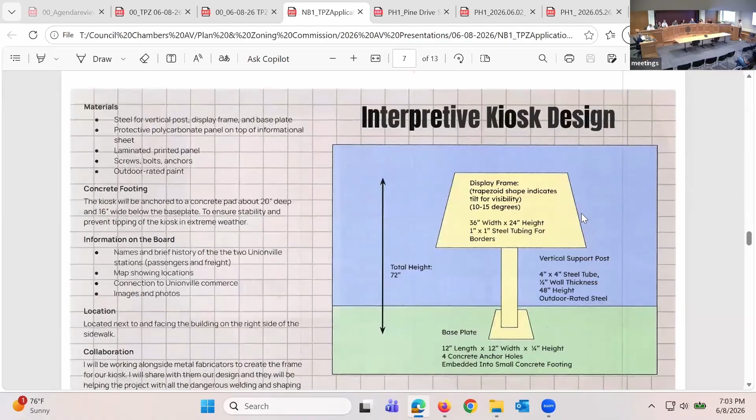So for that, I propose a kiosk which will have all information about that. Details on the kiosk are listed there. Can't see that far, but...

Okay, so for the display, I plan to have it look something like this, where it'll have a panel that will be 36 inches by 24 inches.

And there'll be a tube behind it that'll be 36 inches in width and 24 inches in height, with 1-inch steel tubing for borders. It'll be connected to a base plate, which will have a length of 12 inches.

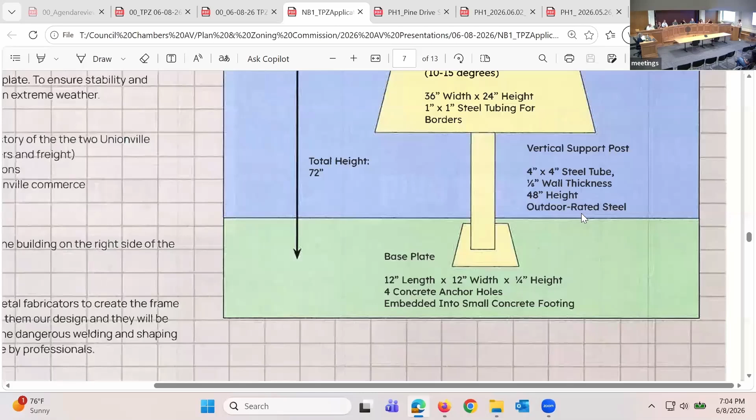And a width of 12 inches with a 1/4-inch height, which will be embedded into a small concrete footing of 20 inches with a width of 12 to 16 inches. The total height of the kiosk is around 72 inches.

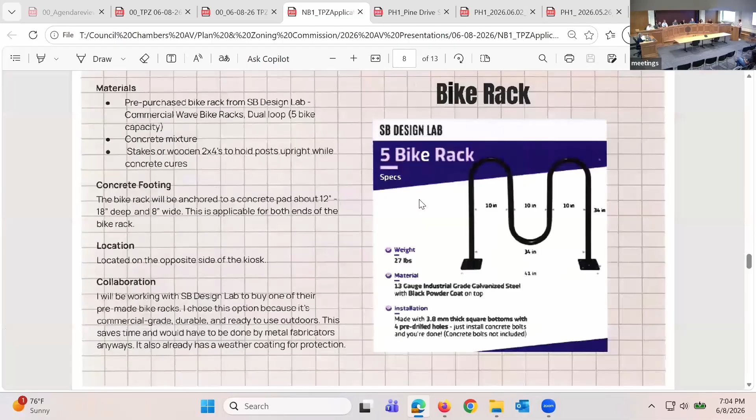It'll be located next to the building, which you'll see in a later slideshow. And my second component, the bike rack, will be bought from SB Design Lab, a company I'm partnering up with for my Eagle project.

I chose to partner up with a company rather than create this bike rack myself, because most of the components of the bike rack include professional fabrication of metal, and scouts wouldn't typically be able to do it because of the danger it poses.

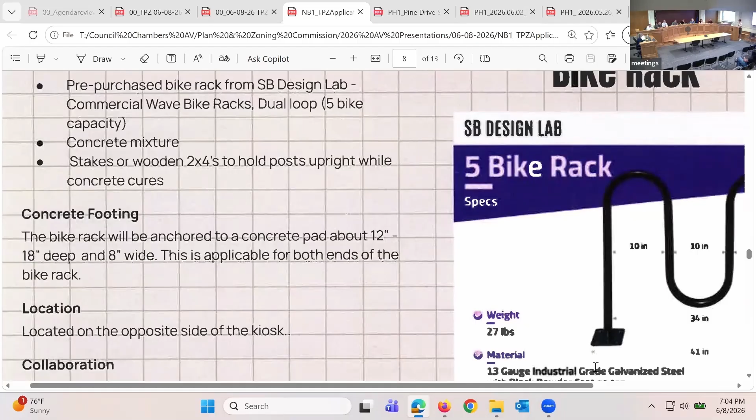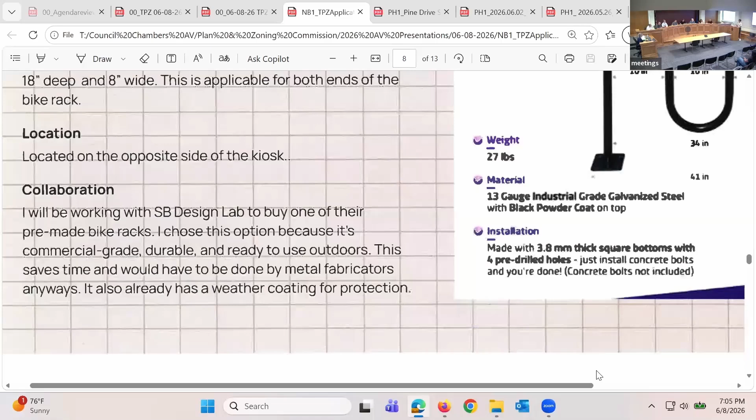But I chose to do it through this company because I checked the reviews and they were great. It was a cost-effective material, and it was really weather resistant, which perfectly fit what I was looking for. It'll be located on the opposite side of the kiosk.

So this is like an initial cost, but it'll be around $550 with approximate tax and no donations. But moving on to the next slide to see all the collaborations that I'll be doing.

First of all, Farmington Displays, where I'll be working with them to help create a panel for my kiosk, which will include all the information, the maps, images, and all the text. They're also helping me figure out the layout of the design overall.

And I chose this company because a lot of previous scouts have also worked with them and have had good success, as well as good donations and helping out the community in total.

My second company, SB Design Lab, like I had said previously, I'd be working with them to create my bike rack. And I had talked with Mr. Sear previously, but unless the town has a specific provider that's more reliable or more wanted, we can definitely pick them as one.

For the metal, actually, I think this is a previous version of my presentation, but I had chosen Metal Supermarkets in West Hartford who had the metal I needed for my kiosk.

That, and they also fabricate it according to my needs. So as for collaborations, those were it.

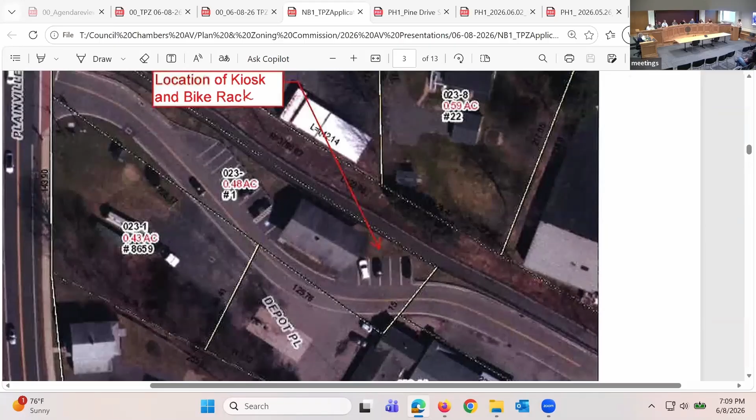Okay, great. All right, now on to the technical stuff - the concrete pad that you're putting in, what's the depth of that? So on the kiosk, it's 20 inches deep. Deep, okay. Yes.

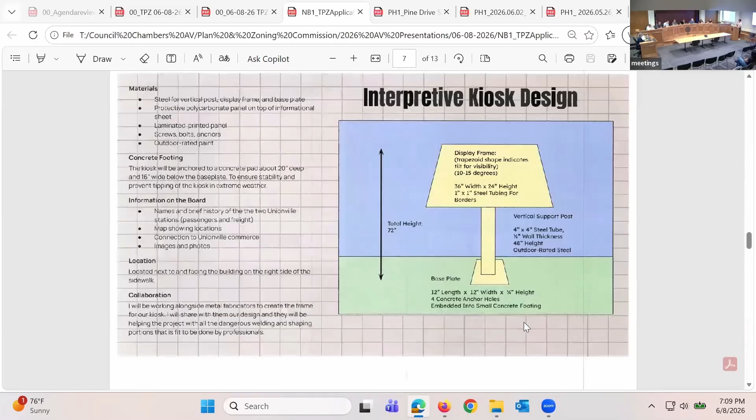So that was one of my questions actually - on the bike rack, I'm not sure if the town would like a concrete pad on both ends, but that's definitely an option, which would be around 12 inches of depth on both ends.

Okay, all right. Just make sure you work with the town on that, especially after this weekend with the windstorms we had - for the kiosk, we don't want it to be a sail, so you want to have a base on it so it's going to hold it upright and not snap off or bounce around on you. Definitely. And then we're going to want it far enough back where nobody's going to hit it going through the trail.

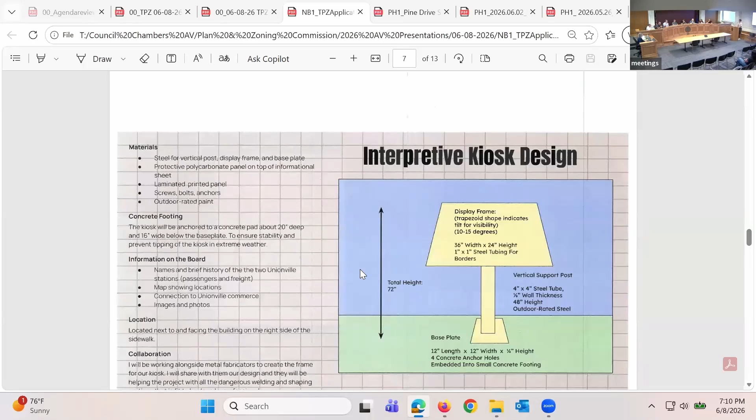I just had two quick questions. One is I couldn't quite understand how it would look when it's standing up - it gets up to 72 inches. Is it tilted? Is it a board that's a trapezoid shape? What does that look like from the side?

So if you were to look at the kiosk standing straight, it would be like if you've ever seen at a park or trail those stands where there's a post and the panel is vertical, kind of angled so you could read it. My idea is similar - it's basically the post and then the panel is angled sideways and tilted, so it's easier for people to see rather than it just being flat on the ground or flat on the pole.

Okay, I guess that's where the 72 inches threw me off, because that's more like a 4 or 5 foot level, not above my head. Yeah, it would be fairly large.

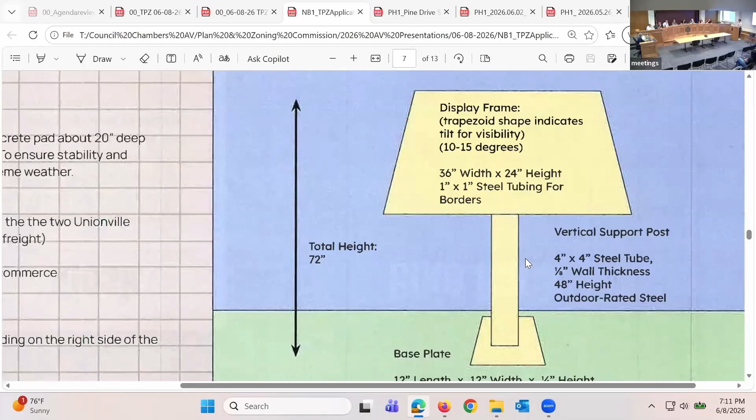My only other question is for the metal tubing you're using, are you going to have any corrosion controls? The tubing I previously thought of is coming from Metal Supermarkets in West Hartford, it's 6013 aluminum alloy, I think. I searched it online and it showed as 20 to 50 years lasting in outdoor weather. Thank you.

Sharia, first I just want to commend you and thank you for your commitment to the town and to the history of our town, spending your time committing to doing something like this to help make things better. So thank you. I could tell from your proposal that you're a detail-oriented person, and I appreciated your presentation. You did very well.

Thank you. I did have some follow-up questions similar to Commissioner Cordero. So at 72 inches, the top of this slanted board will be at 6 feet, and the bottom would be something higher than 5 feet because it'll be on a slant, right? No, the post - no, it'll be between 4 and 5 feet. But am I right about that? So the bottom of the slanted platform would be between 4 and 5 feet, somewhere in there. Yeah, the post itself is 48 inches, and then the others would, if you can visualize that.

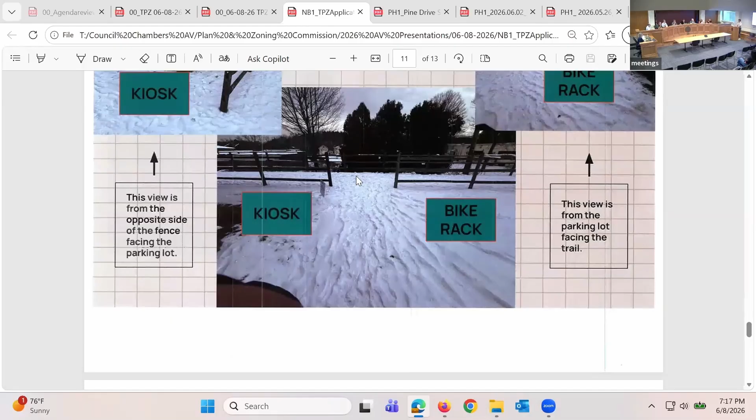Thank you, Mr. Higginson, great presentation. One thing - the picture of where the kiosk and bike rack are going to be, is that an access point to the trail? Yes, in the middle there's a slight opening for trail users. So those aren't going to impede with that access point, correct? Sorry, the kiosk and the bike rack won't impede into that access point? No, the kiosk will be about 2 to 3 feet away from the sidewalk, and so will the bike rack. Okay, alright, that's all.

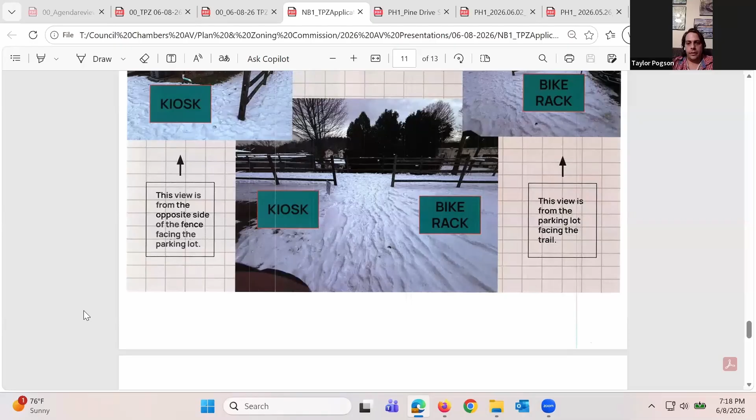I didn't really get your question, could you repeat that? So what's the actual panel, your information panel, made of? So I have to talk with Farmington Displays on that still, I'm not sure what their idea is, but over the panel there will still be a polycarbonate layering, which is kind of like a weather protector sheet that'll keep it secure.

Okay, yeah, so if you're going to do wood, you're going to want something that's rot resistant, bug resistant. You're going to want some kind of pressure treated lumber there, because even with a cover, moisture is going to get under that cover and destroy whatever information you put in there. But I think those are my only two concerns - the height, and keeping in mind what you're making it out of.

Yeah, exactly, that's why I wanted to work with Farmington Displays, because I know they deal with stuff like this and they're professionals at it, and I've seen other scouts have good success with them. So that's why I'm willing to work with them. Awesome, appreciate hearing it. Yes, thank you, no other questions.

Thank you, my turn. So I'm still trying to grasp how the sign looks. I'm thinking 72 inches is taller than me, and I'm not tall. So I'm just wondering, is a sign like this posted at 72 inches, or is it going to be on a post like this, or is it going to be angled? Yeah, it's going to be angled. So it's going to be angled.

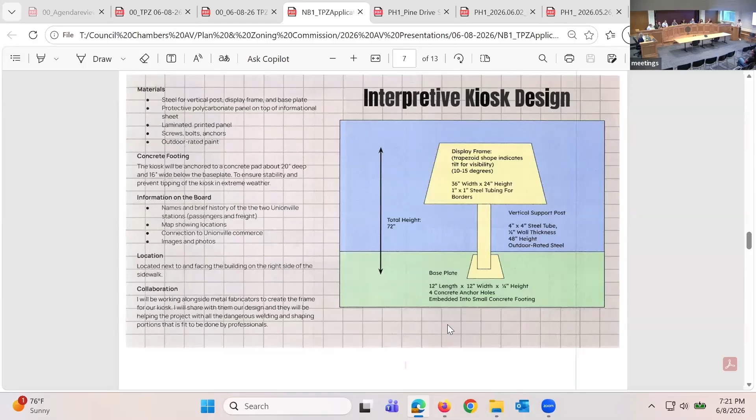Perfect. If I may, I'm going to add one other item, because Mr. Sear and I have been coordinating with Sharia. We've also reached out to the Board of Ed, and we're coordinating with our Highway Department and our Director of Public Works. So the exact location of some of the elements may shift, in that the kiosk may actually come to the east side of the trail, and the bike rack may come in this location in front of the depot.

So we will continue to work with the Eagle Scout candidate regarding these items, but the basic genesis of what you're looking at and discussing is the same. We're just going to fine tune some of these location items as he proceeds through.

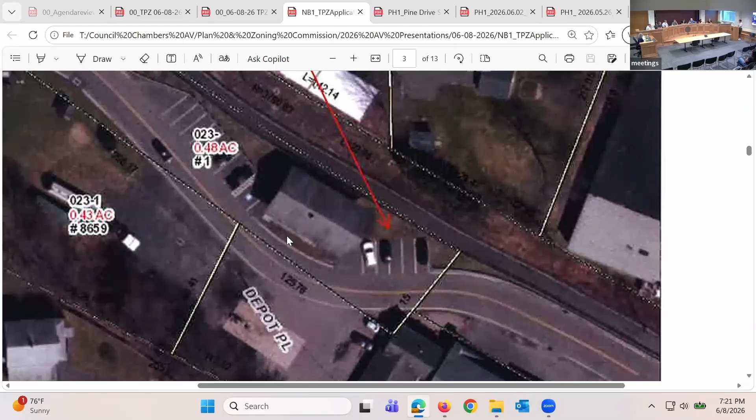Very good, I have one other question. Are you putting a pad underneath the bike rack itself, with concrete underneath it, or will it be two concrete sections where it mounts in and then grass underneath? Currently my idea is to put a concrete pad underneath, but that was my question, if that'd be something you wanted or not, because the bike rack comes with drilled holes I can put into the concrete pad. I think it would make sense to make one, it'd be more durable and secure. Do we have a suggestion on that?

Yes, the concrete pad would be preferable, with bikes going in and out and trying to mow around. You've got the concrete pad that sets the perimeter, and we're hitting the outside edge rather than trying to mow or remove grass in between. There's also the sections of mud underneath, if it becomes a popular location. So concrete pad generally works out best.

All right, just for my own clarification, because I'm pretty sure I get it now. I had in my head that it was like the last one we came in, where it was kind of a covered A-frame. This is more like an easel, correct. And we might switch.

So it's currently that, and we've looked at going vertical with a little roof on it. This, I think, if we can get it weather resistant and there's enough shade in that area, depending on which side we're at with the actual depot building there, the sun damage and deterioration is probably more limited at this location than it was at Red Oak Hill.

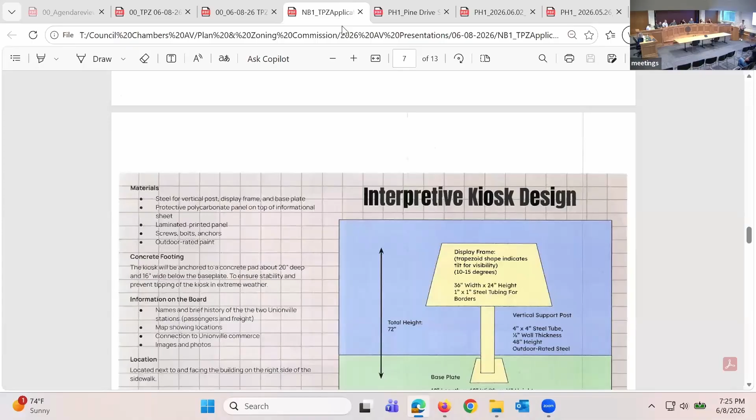Please do. Notice is hereby given that the Town Plan and Zoning Commission will hold a hybrid in-person and online public hearing on June 8th, 2026 at 7 p.m. in the Town Hall Annex, Council Chambers, 1 Monteith Drive, on the following application: Elizabeth and Manuel Coelho, application for special permit and site plan approval for a new single-family home in excess of 1,600 square feet living area and 2,200 square feet total area at Lot 8638 Pine Drive, R9 LG zone.

Interested parties are encouraged to participate in this hybrid public hearing. Participation in person is at 1 Monteith Drive, Town Hall Annex, Town Council Chambers, or online participation via the link to the meeting on the Town of Farmington's website. I don't have to read the address, do I? No, okay. A copy of this proposal is online, or can be had by calling the Planning Department at Farmington Town Hall at 860-675-2325.

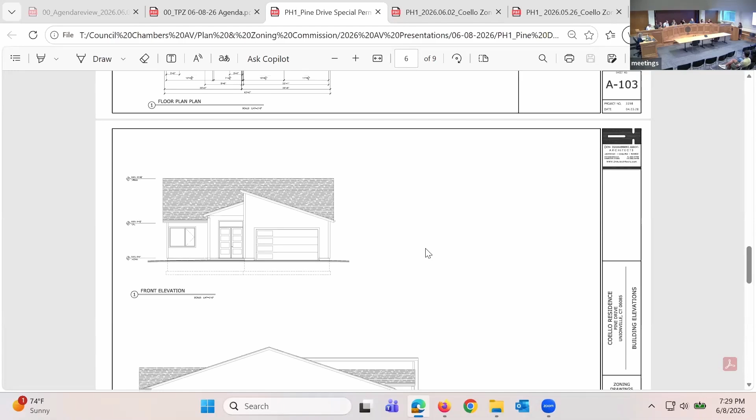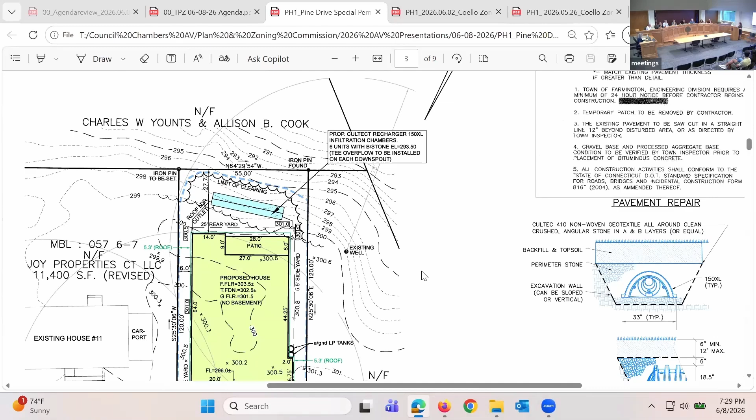However, we started talking with planning and zoning about a year ago about what our dream was to build on that lot. We came up with a design that was, since the lot was 50 feet wide, with setbacks, the largest house would be around 40 feet wide. We wanted to build a one-story house because we felt like it really would go with the character of the neighborhood. As you know, a lot of Lake Garda houses there are several 2 stories, but some are small cottages still. So we came up with a design that we loved.

And then we looked at it a little closer, and thought if we could take 5 feet from 11 Pine Drive, which has a 100-foot lot, and move it to 8638, we could expand the garage a few feet and make it a lot more usable. And also we could have the propane on the side of the house instead of in the back. And also we could space out the lot a little bit from both houses, so it'd be more centered between both houses.

So when we started exploring this, the 5-foot addition to the lot, even though we own both, it changes the lot. So the setbacks are all the same, but that causes this special permit request, because when you change a lot of record, there's another set of special regulations, which is the 1,600 square foot. That was not really in play if we kept the lot at 50 feet, but we just felt this design was much better. So we decided to delay the project 2 months to come do this and see what you guys think.

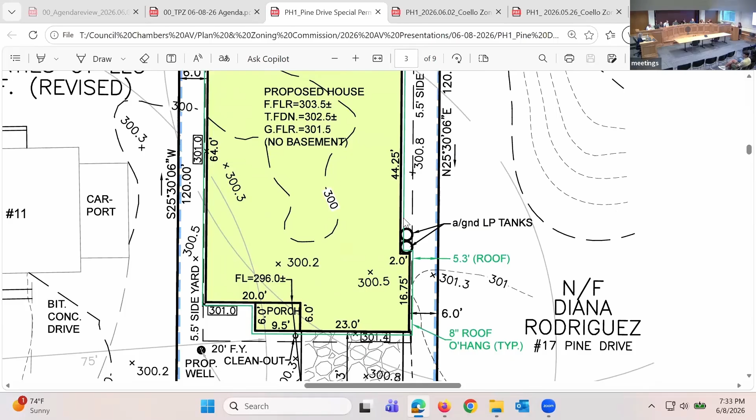So for about 16.5 feet, that would be the 6-foot setback, up to the 6-foot setback, on both sides of the house.

Yeah, that's where it's confusing because it says 5.5 foot side yard, but then it says 6 feet. So the 5.5 feet is the mandatory side yard setback minimum, that's how close it could be. That's a setback requirement. The house will actually be located 6 feet and 6 feet. There's a 2-foot jog, so it pushes back to 8 feet.

The setback in this zone is 10% of the lot frontage. So at 55 feet, it puts it at 5.5 feet for each side. And a minimum of 6 is being provided on each side. Thank you, now it makes sense.

You're welcome, there was a lot of it. There's a lot of details. I tried to walk through most of it in the agenda review, but it's not one of the more straightforward processes.

All right, come back to me. I'm gonna.

Okay, so I'm still wrapping my head around the same sets of questions. I thought I understood this coming into the meeting, but now I know that I don't. It honestly took us about a year to get to this point.

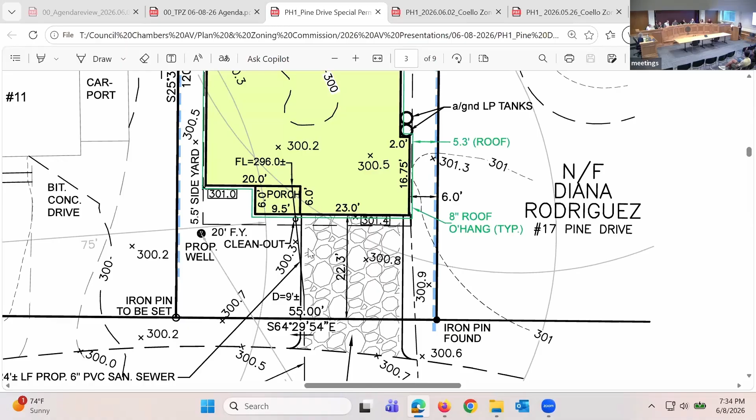So I know we took 5 feet from 11, when I looked at this before, it looked like you couldn't take any more without having a problem with that lot. Well, just because of, like our town planner mentioned, the 10% of frontage. So if you have the 100-foot frontage for 11 Pine, then 10% of that is 10 feet.

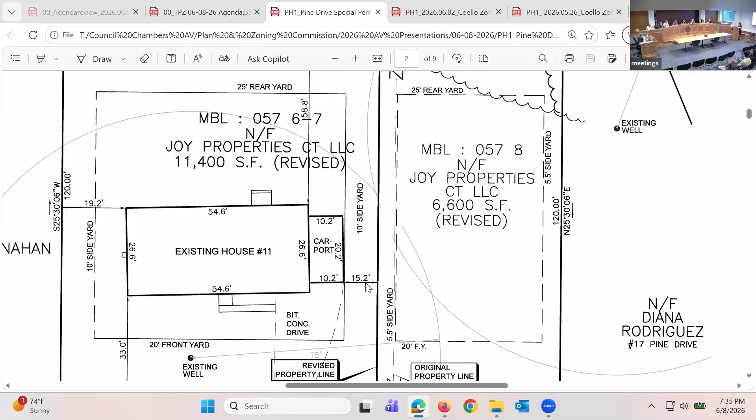So we were kind of going with that 95-foot. We would reduce that to 95 feet instead of 100. So then that would cause the side of the carport to need 9.5 feet. And it'll be just a little bit over that, I think, really close to that. So 9.5 feet on the side of the carport.

Even though the carport is open, it's just like a little roof, it's not enclosed, but it's still part of that setback requirement. So I think the bottom line is you can't get a frontage that's conforming.

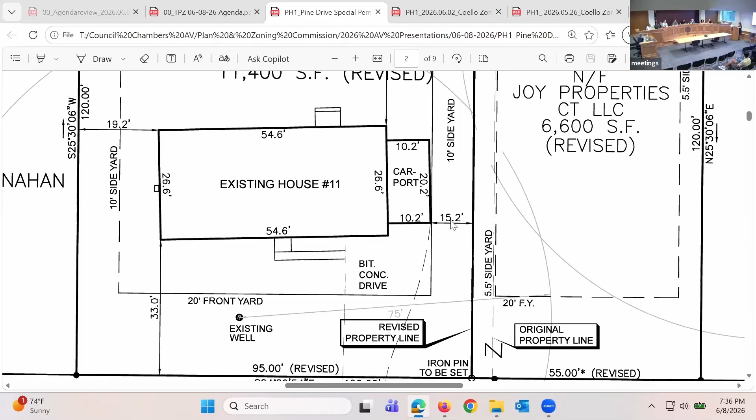No, but it does make the lot less non-conforming. So it has been a lot of record since, I think, 46, but I could be wrong. I was looking for the deed but it's been for a long time.

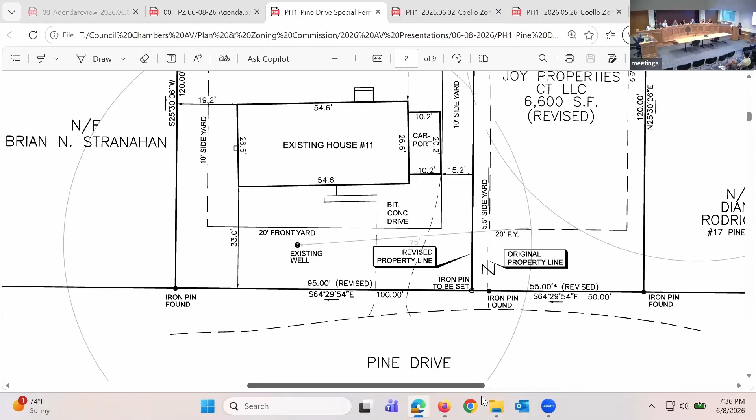And it does make both 11 Pine still conforming, even losing 5 feet. And it'll be 15 Pine probably when a house is on it, but right now 8638 is still more conforming than it was, because theoretically now everyone would like it to be 75 feet instead of 50.

Okay, I think I totally understand it now. The other part that I think is a little bit difficult when looking at this is we have a lot that's not quite large enough, and then we're filling it with house. So it almost exacerbates the issue. If it were one or the other, I think it'd be easier to look at and say this shouldn't be an issue, but we're putting a large house on it.

And I think I understand now because you want it to be one floor, which I think I understand that motivation. Did you explore anything else to potentially fit in this lot?

Yes, we did. We felt that a one-story house actually goes better with the character of the neighborhood, and the houses next door are, well, 11 Pine is 1,400 square foot, one story with a full finished, well mostly finished basement. And although we did explore other options, we felt that this, even though the footprint is large, it's mostly facing towards the back. So from the street, the look of it is very similar to other houses as far as size and height.

So that's one reason we settled. We really liked that design. Obviously you get a better lake view the higher up you go. But considering the houses in the neighborhood and the houses right next door, this seemed the best option aesthetically.

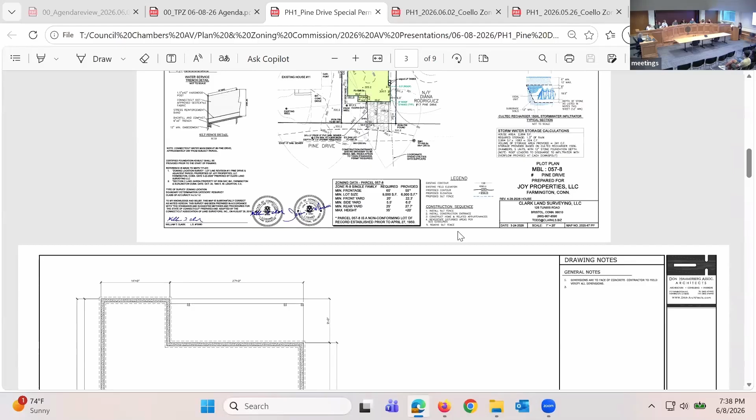So I too share some of the concerns about it. It's just an intense usage of the land. I think I'm more concerned with the distance to the side yards, which I understand you're at the minimum on the non-conforming lot.

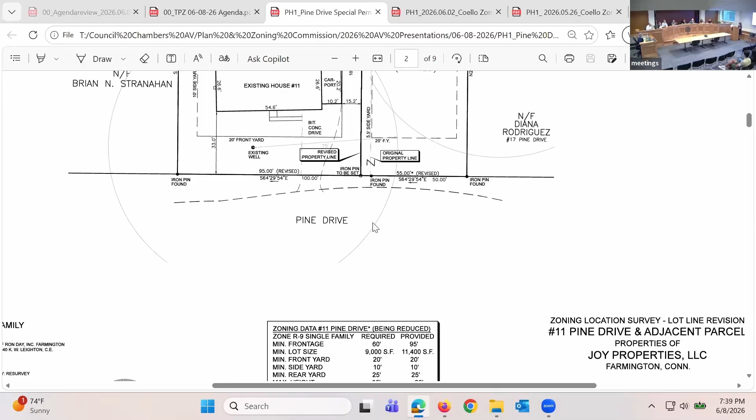If I can dive into the details of how many feet you took, or could take, from 11 Pine, if I'm understanding correctly, there's probably another 3 to 4 feet you could potentially take and still keep that lot conforming. Because as you take a foot, you reduce the overall width, but the setback does not shrink since it's a conforming lot, so it stays at 10 feet.

Is that right? No, it would go to 10%, so 9.5. We were at, so if the lot was 120 feet, the maximum is 10 feet. But as the lot reduces, the side yard setback goes to 10% of the lot width.

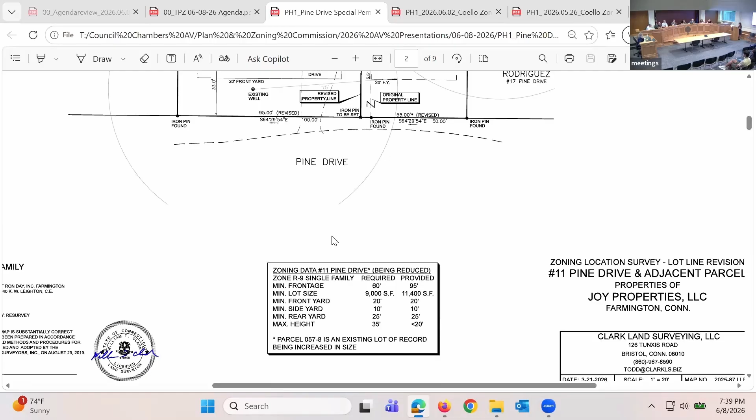So just from an intensity standpoint, I commend the one-story attempt here, and I think that probably fits more in character with the neighborhood. I know there are some 2-story homes across the street and in the neighborhood, but I get where you're going.

I do feel it's a little bit tight, being so close to the property lines. I did also have some questions or concerns, which I think the planning staff had called out as well, about the propane tanks.

Do you know the size of the propane tanks by any chance? I believe they're 30 inches in diameter, round.

We designed it so the propane tanks have a different setback than the 6 foot - they have a 5 foot setback, and they do have to be screened from view. So this was designed to fit those two propane tanks, as well as screen it from the street, shield it from the street, and also comply with the fence requirement to screen them, as requested by Article 3, Section A, I think.

So would it be screened with a fence, are you thinking? Well, we will agree to address that with whatever's normal and customary, because that's the new requirement - you have like a cover. Right, it has to be screened from the neighbor as well. Yeah, it's a new requirement, so other properties, like her yard, aren't screened, but we would want to comply with all the regulations.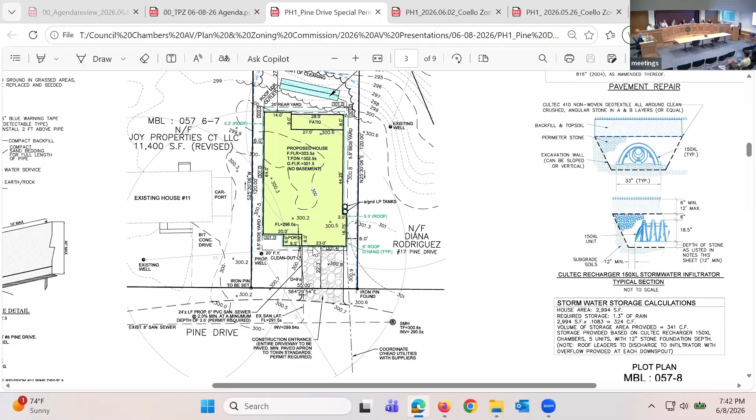I did notice that the neighbor has what appears to be, at least as of late 2025 Street View, a whole home automatic generator in that vicinity. Because their house was not on your site plan, I wasn't sure where to draw the line, but right behind that bush there is a generator, and I don't know how far that is from where the propane tanks might be, but it's something to consider.

Sure, yeah, we should address that for sure. I think you need to be 10 feet from it, so you're probably 10 feet from it, but it's also probably close. Good point, I'll make a note of that and check it out.

And so I guess just in terms of, it's 5 feet from the garage part, right? It's 7 feet to the part behind the garage. It said 2 feet, I thought, was like that little corner there. Yeah, so it's 2 feet.

So the 30-inch tanks will stick out a bit - if the tanks are actually touching the house, they'll stick out 6 inches. They may stick out more depending on whether it's a valve or a hose coming off it into the house, depending on how it's exactly set up. So you've got a little less than 6 feet to the property line from the tanks.

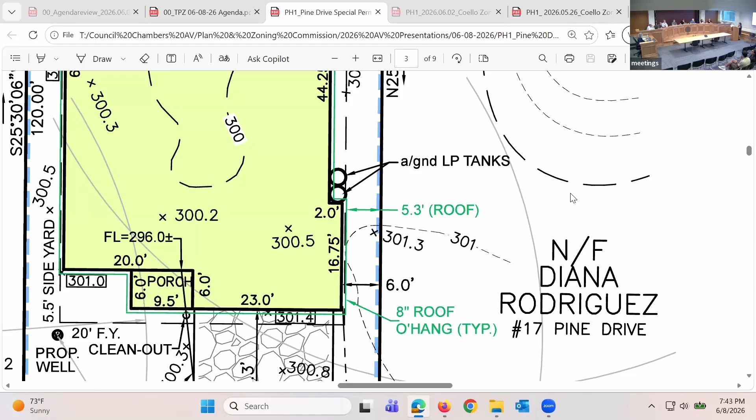And that requirement is 5 feet, I believe. That requirement is 5 feet - Garrett and I had so many conversations about the propane tanks, I can't tell you - 5 feet. But we did not think about the generator.

We do have it spaced from the doors and windows as required. I'll check out how it would line up with anything on the neighbor's side. You're probably 10 feet from it, which I think is the requirement, though I don't know if that's a zoning requirement or a fire safety requirement. That's just what I saw when I was doing some research, but don't take that as gospel, we'll definitely check it out.

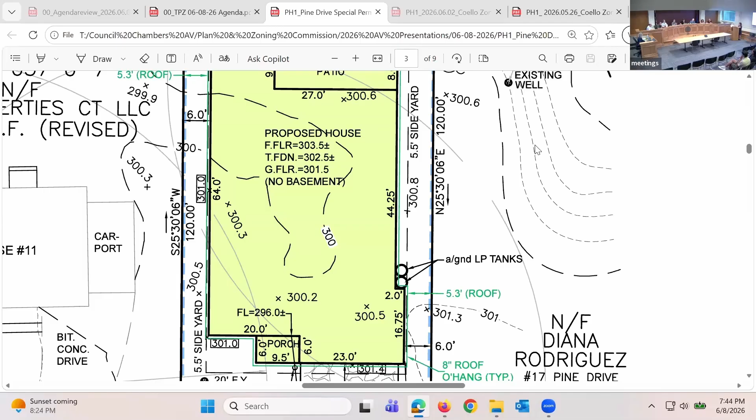I guess it's an intense use of the land, right? While there are other homes that are as big or bigger, I don't know if there are other homes this big on this small of a lot. There are other lots this small, but the homes appear, from what I could tell, to be smaller. So maybe this is a question: are there other lots this small that have homes this big?

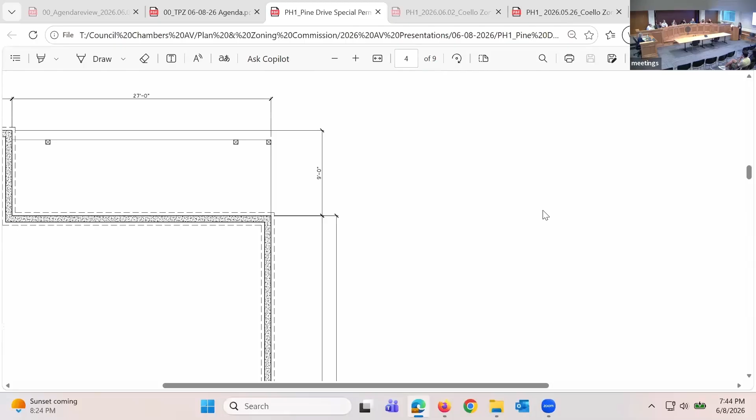I was going to bring up, I'm not sure if Mrs. Rutherford has the chart. I made a chart just in case we asked that question, because the publicly listed square footages for nearby homes, including those marketed on Zillow and Realtor.com, show the neighborhood consists of homes much larger than the minimums in this regulation. I also looked at the other zip code, 032, which has significantly larger lot sizes and almost double the average house size.

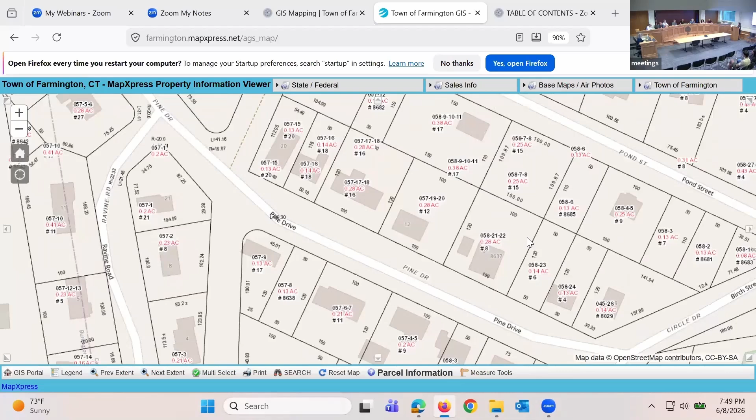But are you amenable to potentially taking more land, more of the frontage from 11 Pine Drive, keeping the house footprint the same, maybe shifting it over? I don't know if this is possible, but shifting it 2-3 feet, whatever extra you can get, just to give it a little bit more breathing room.

Well, my understanding is that we're at the max from the surveyor and from planning, unless we took out the carport. Unless the carport was taken down. Because I thought if it's 15 feet... that's not after.

I think that dimension has to be - if this line is 10 feet, then the 15-foot dimension is incorrect. I think it's incorrect. Unfortunately there's a couple of errors on the survey. This lot line - I thought there might be an extra few feet. So that was probably to the original, and the text edit didn't happen. The arrow should be to the other dotted line. Correct, so this is showing 10 feet. I think there is a mistake there.

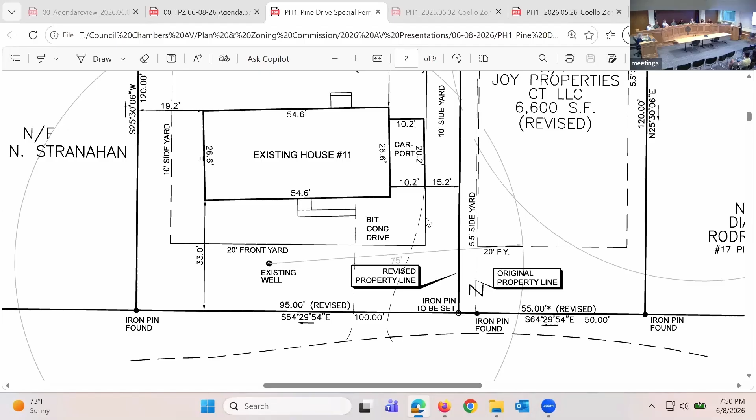Okay, thanks for pointing that out. No, it's okay, I was looking for a solution. We definitely explored a lot of options here, but I think the fact that it goes back deeper has maybe less of a big backyard, but I feel like it'll be a very beautiful home for the area.

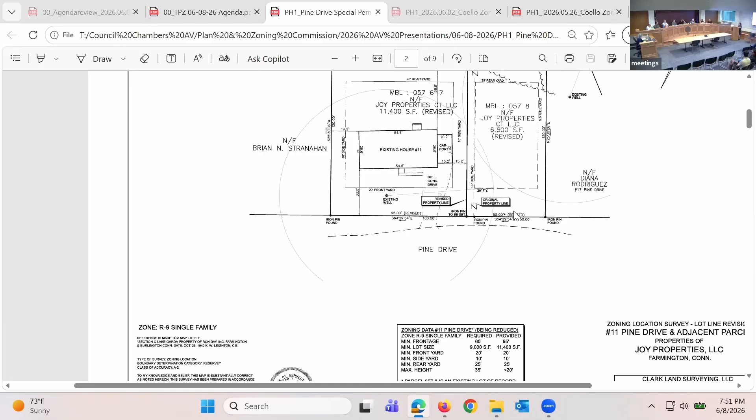And then I don't know how much you'd be able to answer this, but the stormwater system planned for the backyard - my understanding is it's sort of a temporary holding tool that will take stormwater during heavy rainfall or a big storm and allow it to flow downhill behind you to your neighbor over a longer period of time than if it was just the current graded land. Is that accurate to your understanding?

Well, hot off the press - as of our conversations last week with the planning department, Garrett had asked that we propose possibly doing a mafia block or stone retaining wall in the back to help with erosion. So he asked for a revised site plan, which I didn't get big, but I have it here small, to include a potential retaining wall in the back, a 4-foot high retaining wall, just to help shore that up, because there is a drop after the property.

So that would also help - that includes the drainage system that was requested by the town, the infiltration chambers, and also includes drainage for a retaining wall in back. And it has a curve to address.

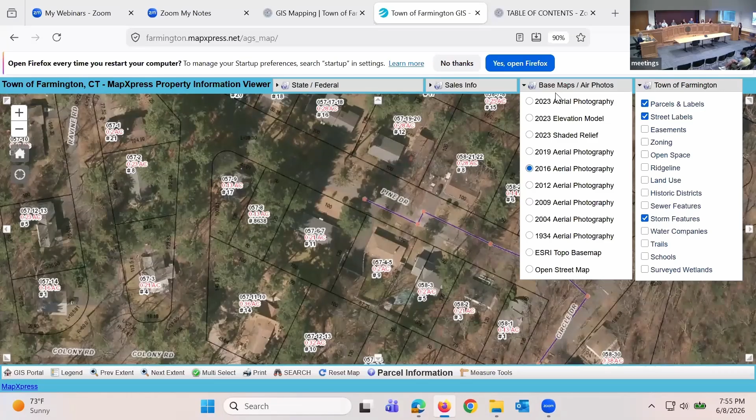But I'm also not seeing any drainage structures. It is very, very sandy out here. I don't know the water table elevation. There is sanitary sewer. The infiltration system is designed to take the first 1.3 inches of rainfall that comes off the roof - the entire roof system, so everything that's impervious except the driveway.

The driveway would sheet flow back out onto Pine Drive anyhow, but all the roof leaders will connect in and tie into these underground Cultec chambers. So it's designed for the first 1.3 inches, actually going to be just a little bit over that. And then there's an overflow, so for a larger storm it'll overtop.

For example, this weekend when we had that heavy rain Saturday night, we got 6 to 7/10 of an inch of rain. From a perspective standpoint, that's assuming it all gets into the gutters and doesn't overflow onto their own yard. I know it came down pretty heavy. For a longer duration storm that's not as intense, it's entirely possible the infiltrators with good media and good sand have the potential to take more volume, if it's slower and not quite as intense as we had this weekend, but that's the principle.

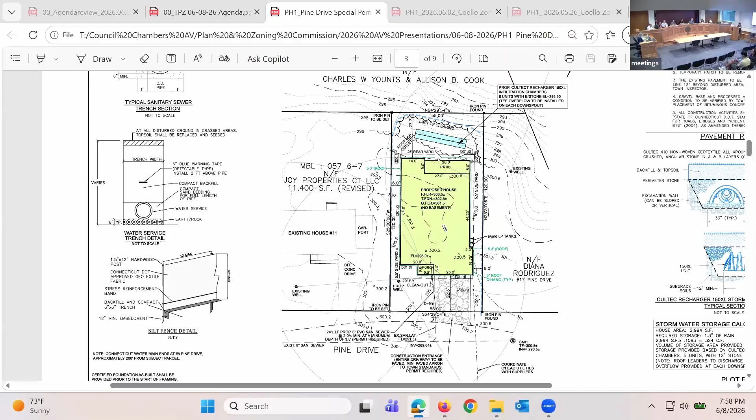Right now there is no usable backyard space the way this is shown. You've got a patio - we've got a finished floor elevation, a top of foundation, and a finished floor of 303.5, and a step down to a patio and then a 300 contour here. So there's probably a little bit of grading. Your foundation elevation, you could have a couple of steps out to the patio and exposed foundation at the rear, which would not be unusual.

But if you create a retaining wall here, it will give you a little bit of usable yard area, which may have been part of the conversation. It looks like in the plan just handed out, at the very top there's an image of a concrete block wall with a dashed line that says existing grade, sort of a straight diagonal. Then there's a solid black line that says finished grade, flatter at the beginning, sloping down to the wall, which then shows filter fabric, 3/4 inch stone, and a perforated 2-inch PVC pipe underneath the wall that exits under the wall, sort of downslope, probably close to the property line. Correct.

Okay, thank you for all of that. Sure, and that is background something we would review to make sure we understood where that downstream location is and that it is getting to the right of way and not somebody's front door. Okay.

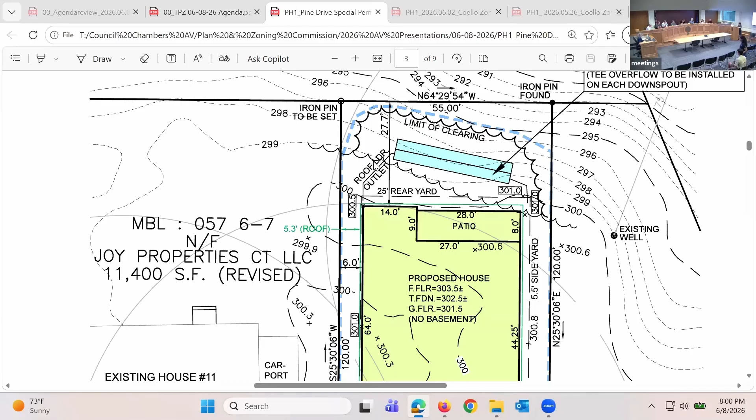Good evening. Hi, I didn't see a measurement anywhere - maybe I missed it. What's the distance between the edge of the proposed construction and the home on 17 Pine Drive? Do you know what that distance is? I'm not sure if that's on any of these maps. Let me check, I don't think we're going to get that exactly.

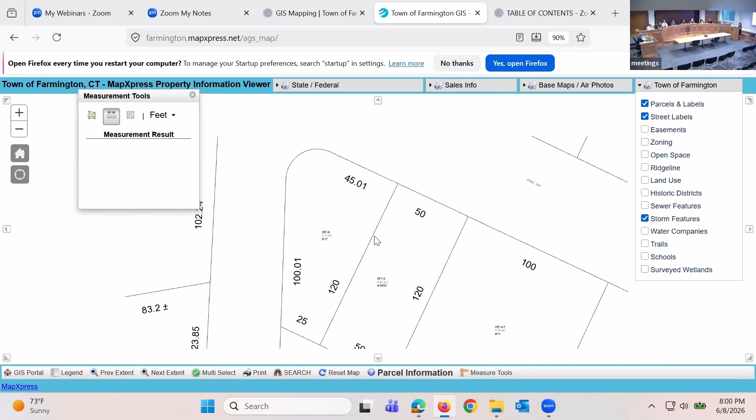I'm not sure if it's on the map, to be honest. But I can estimate it. Just being out there a lot, mowing the lawn last week, I'm guessing their house is around 10 feet from their property line. So that would be my guess. Maybe 8.

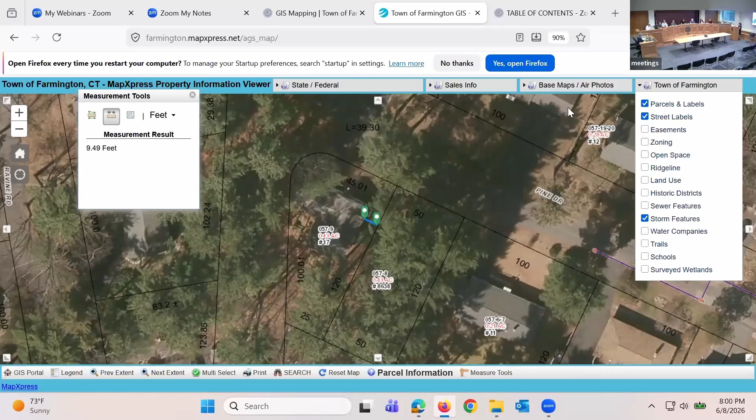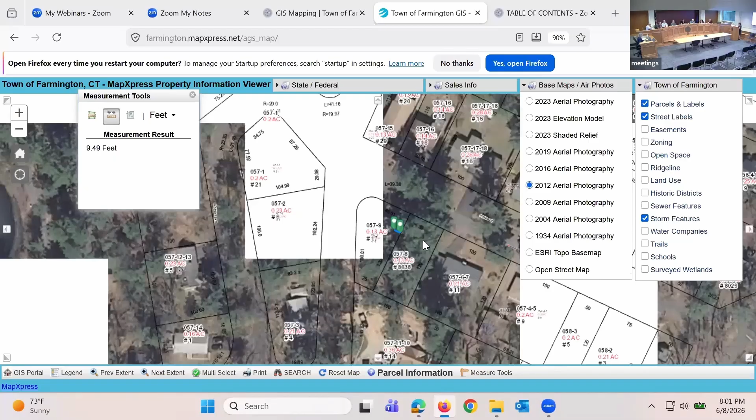And then what's driving essentially the 400 square feet of living space above the R9 zone limit? Well, basically just the idea that a single family - Farmington has more options as more existing homes are smaller. So I wanted to be, because the cost of building has gone up so much.

My builder said it's doubled in the last 6 years. I wanted it to be a marketable home that was able to accommodate the needs of a larger family, because a smaller family has more existing home options, or the apartments and townhomes in Farmington have increased. So smaller families have more options.

But I feel like when you're talking about building, I wanted to be more in line with that chart we were looking at before about new construction sizes, just so that it's keeping up with inflation - that the investment would be worth it to make it something a larger family could use.

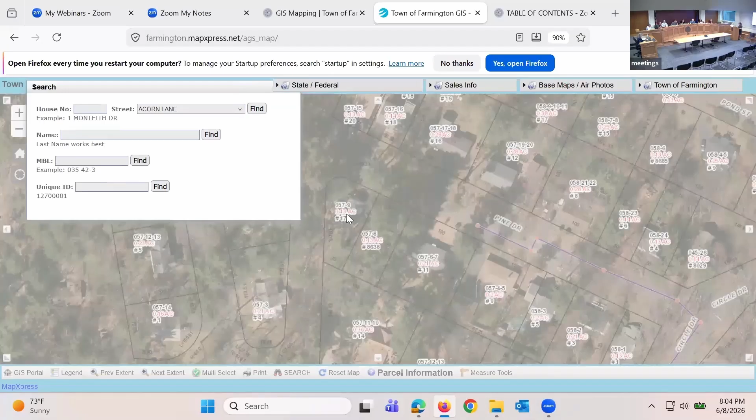And that's a reason why I wanted to give some other data of local homes that was not exactly the town data, because this is the reality - people are buying homes from those websites and marketing their homes, and a lot of them include a second finished level or an addition. So it's entirely possible if the basement was finished, it's marketed with the finished basement as living area.

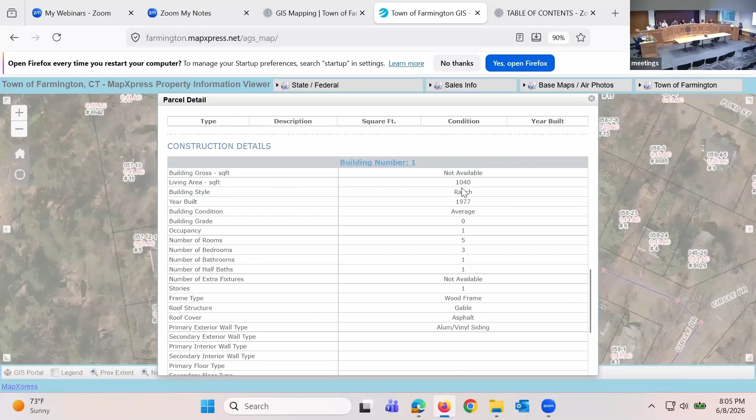Right, both our regulations - so living area, this is 17 Pine Drive. And the living area on the assessor's record takes the area above grade level. It's referred to as a ranch style, and it's 1,040 square feet, built in 1977.

So if any portion of the basement is finished, it's not included in our assessor's data, and that is consistent with how the regulation is worded as well. So the basement, whether finished or unfinished, does not count for or against you with respect to this expanded home regulation.

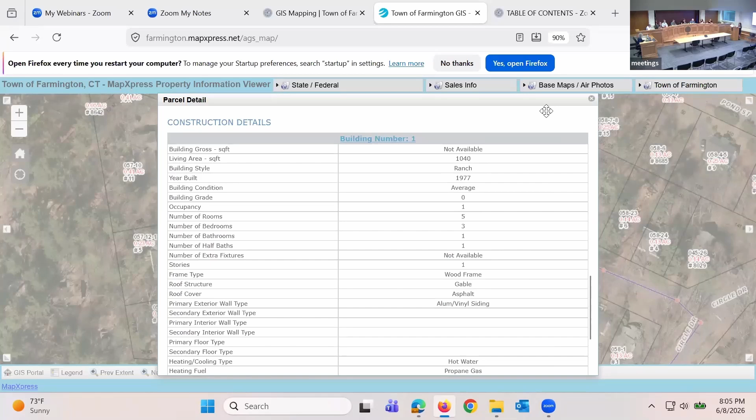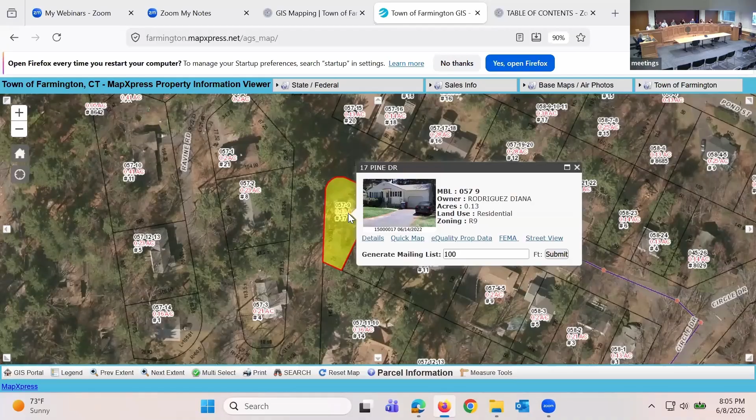So they could reduce the size of the house, put a basement in, and choose to finish it. This particular one has a walkout second level, like with a door - it might have a walkout in the basement because the grade drops off, since that's on a slope where this one is more flat.

It's listed on Realtor as 1,040 square feet above grade and 780 below grade. So yeah, if it's got a walkout basement out the back - this grade almost gets you there, but doesn't quite. If that grade continues across, then that's understandable. But again, a basement's a basement - for the way we look at it, even if it's finished, we don't count it for or against.

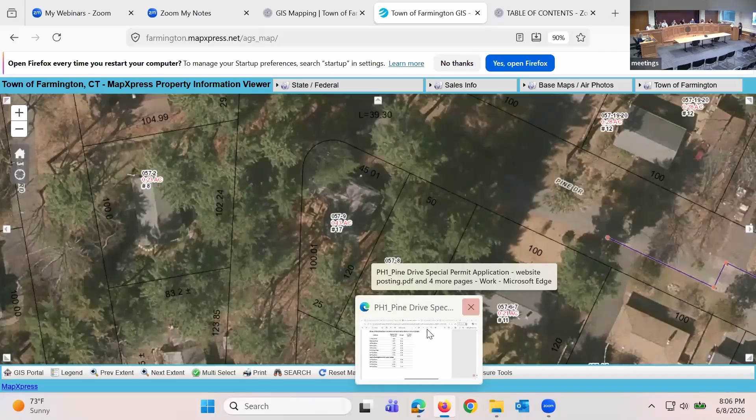Assuming all the required public notices went out, have you received any oppositions to your application from any neighbors or anything? So we...

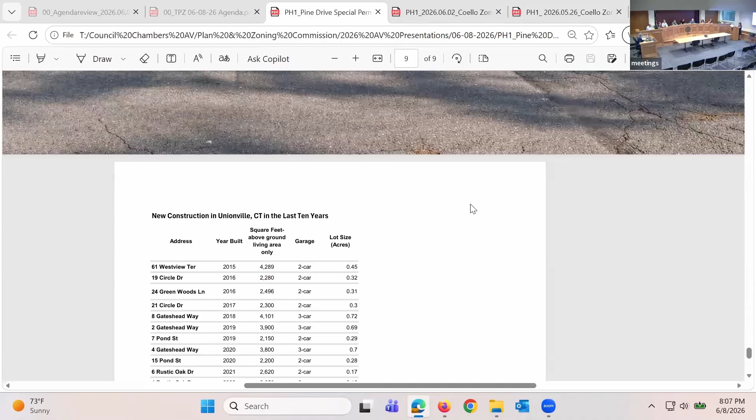We received two notes of support, one from Diana Rodriguez next door and one from Marcy Lostrapo on Colony. As far as opposition, I only received some questions about the project, just interest from our neighbors Wes and Allison behind us in the Colony. I can't remember the actual address, but they had asked to see a little bit of information about it.

The other neighbors we talked to were more at the beginning of last summer when we started the project and began considering the trees, and they had a lot of concerns about those. Sal, across the street, was very thankful, saying he's glad we're taking the trees down because five trees have fallen in the last few years, mostly onto houses—one even fell on 11 Pine. Neighbors commented they were thankful, even though everyone loves a tree, because of the danger of over 100-foot pine trees, some of them rotten. There were comments like being happy to see a house there instead of trees, since I believe that's why they sold 11 Pine—a tree fell right onto the kitchen. So when we bought it, it already had new siding and a new roof on that side.

Also, a lot of people were very supportive because when we bought 11 Pine, my husband and I put a lot of elbow grease into it, and they could see us out there tiling, painting, doing the yard with our kids. I feel like they have a little respect for people from the neighborhood wanting to buy a house that maybe their kids will live in someday, just a few blocks from their own, as we did. Another neighbor, Cindy—she and Brian are great, they're on the other side of 11 Pine, maybe number 8—had just bought solar panels, so she said, 'Thank you for taking the trees, now I'm actually getting some value out of my solar panels.' Since we sent out the notices, there have been no other comments.

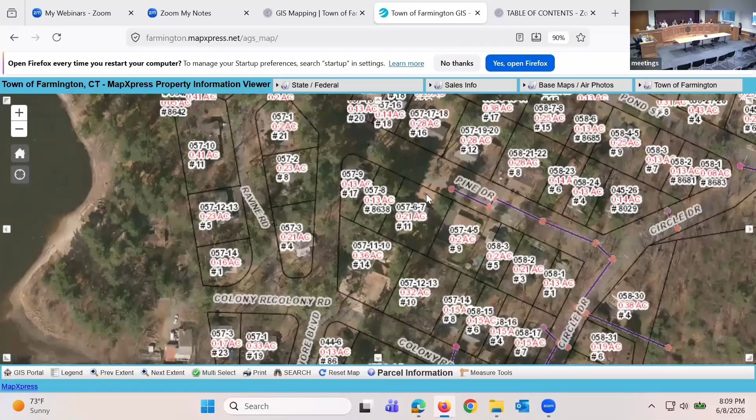I understand the reason you're doing this, and I respect that very much—the sweat equity and building a home your family could potentially move into later. Without elevation renderings I can't fully see how it impacts everyone, but I have to say it's really visually dominating, and it does sort of intrude on the character of the neighborhood, starting to feel like it's being overdeveloped and crowding.

I feel like it should be more sensitive to the neighbors—not opposed to what you're trying to do, but without any yard space it pushes all the legal parameters, and the design seems to dominate what could otherwise be a more conforming home. I don't know if you already went over the history, but would you consider a two-story home that's more traditional for the neighborhood, with more basement space and maybe a first-floor master, to suit more long-term or multi-generational use?

Well, we did consider two-story plans. This site plan rendering—it's hard to say if that's actually how it's going to look, to be honest, because of the AI. I feel like the height is about the same as the neighbor's house, and the front of 17 and the front of our house will be right at the same point, which is hard to see in that picture because there are limits to taking a photo and squishing it in there. I think it'll look better than what you see, to be honest.

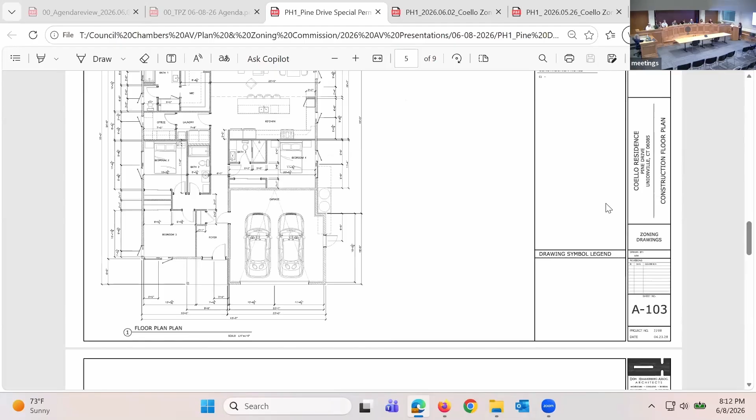I thank you for that. I really can't get past how visually dominating it does feel. It would look more appropriate with a more traditional design of the house, and maybe a cape would not look as non-traditional as a contemporary home. I'm just looking at preserving the long-term character of the neighborhood. Appreciate those comments, thank you.

Just one thing, Shannon, can we go down a couple houses from there? It's about the same lot size. Sure, just so I can get a visual to see how that house looks on the lot, because it's basically the same size lot, 50 by 120. I think it's from number 5, maybe.

So number 5 is a little different, I think number 5's had a lot line revision. Oh, has it? Yeah. All right, there are two on the other side that are similar, I believe. But I just kind of want to look at that one too.

I agree, it is kind of visually imposing by looking at the picture that we're being shown. I just kind of want to get a visual of what house is there, roughly the same size lot. I went to number 1, it's a 50 by 120. That's a town-owned house, right? It is. Wow, I didn't realize. And I believe the one across the street from there is also.

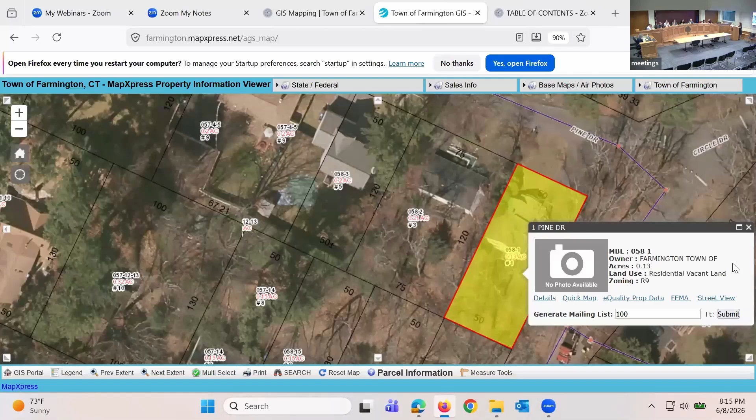So if I go to the building information, maybe... it's not bringing up... building, okay, I can't pull the field card. All right, I don't know why it's all blank. We're gonna have to pick another one. Is this even a house at all? Because there's no taxes maybe paid. The town should still have the building tax information, but that's a whole other thing. I don't know, anyway.

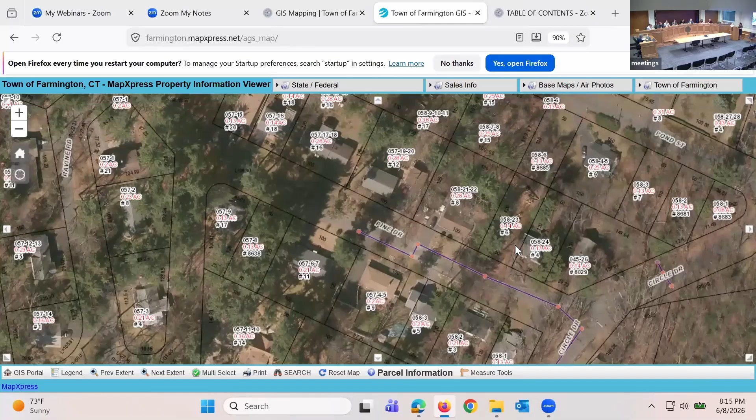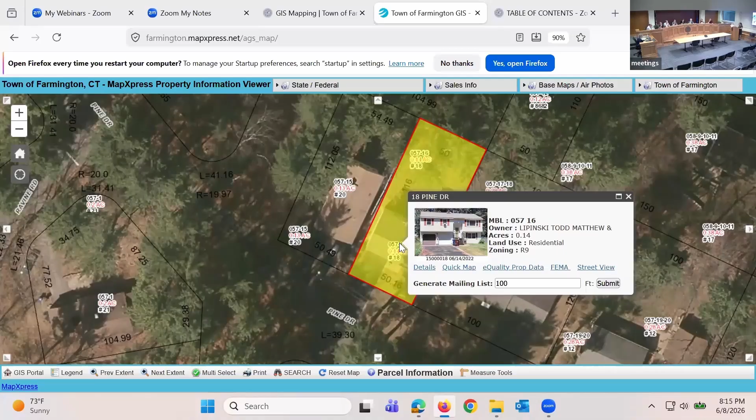Okay, what's that one next? I think there are some on the other side of the street, on the left, that are similar sized, toward the very end of the street. I can't see, my eyes. Number 18, yeah, those. Maybe 14 and 18, those are similar in size, I believe. And 20, which I think I grabbed in my summary list, and they are both raised ranches.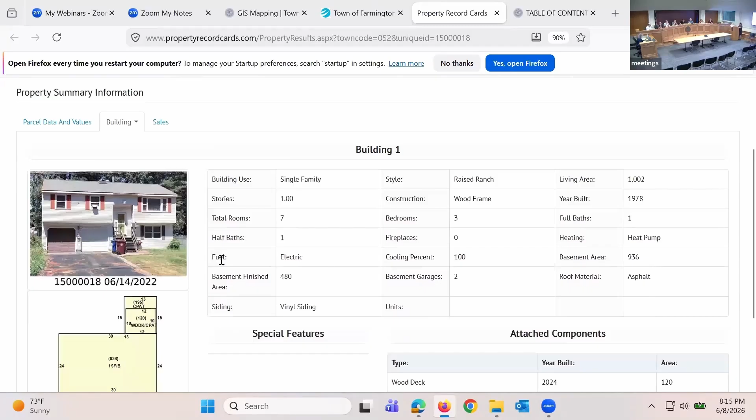It's rotated 90 degrees, facing that way, right? Yes, correct. Okay, all right. No, that's okay, I have nothing else right now, I'm good. Mr. Pogson? Yeah, sorry if you can't see me, I don't know what's going on, I'm having camera issues, but regardless.

I think if I had anything to say, I would just wind up echoing pretty much everything that's been said by the other commissioners. It is quite cramped in there, that's kind of my concern for the property and everything that was discussed about the drainage issues. But I don't really have anything new to add, unfortunately, so that's all I've got.

All right, thanks. I've got a couple of questions. In terms of the cover, you said there's gonna be some kind of screening for the tanks off to the side. Have you got plans for that? Not yet, because I think that would depend. I think on the left side we'd put a hedge, but on the right side, I think it depends on what we decide with the neighbors, like what would they like, do they like a hedge, do they like a fence?

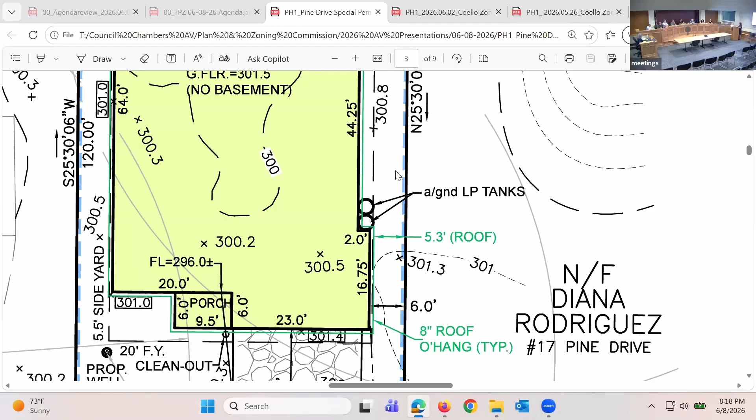And the question for you is, we don't have regulations in terms of size of a building on a property. We have that, I think, for businesses, but for commercial property, in terms of percentage of the lot taken up with building. No, and we don't have floor area ratio - Unionville Center is the only place.

So we don't have a maximum impervious coverage requirement in our residential. We have maximum impervious for our business, which would include the roof area and the driveway. But I've got the house, so the lot is 6,600 and the house is 2,540 with the garage. That does not include the patios and porches.

So just the house, you're just under 50%. You're probably around 40-ish percent, because 6,600 would be 3,300 for 50%. We're at 2,540 for the rooftop. And then you've got patio, porch, and the driveway.

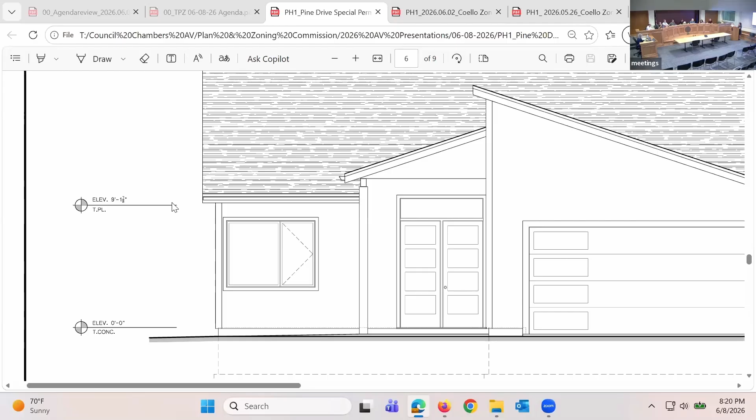And from the pictures, it seems like the house is about 20 feet tall. It's 21. On the left-hand side, that ranch seems significantly shorter. So we've got 20, 21. The eave is at 9 feet, and the peak is at 20 feet, 10 inches.

So if we go down, the 9-foot eave is almost in line. It's a much flatter pitch on that home.

Can you talk a little bit about the height, because there's a lot of attic there? According to the architect, which is very hard to see from the pictures, the height is more towards the back of the actual building, so it's not directly in the front. That was part of the original design.

I think it has higher ceilings overall. Some of the ceilings are 10 feet - the living room ceiling is 10 foot - the rest of the ceilings are 9 foot in the main part of the main house.

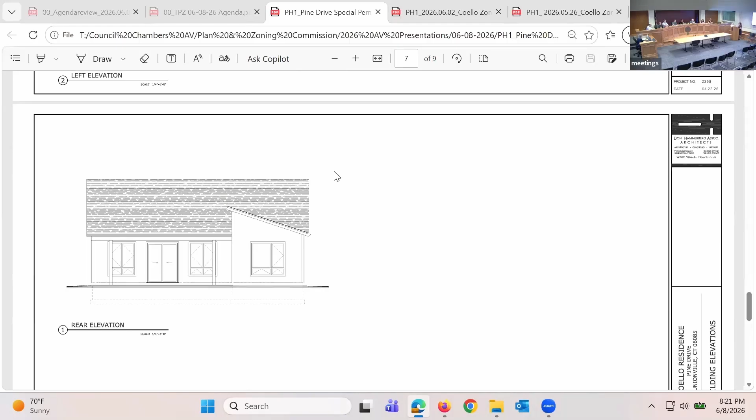Is any of the water going into the sewers, or is it all going into that unit in the back from the house? So the storm, the roof leaders will connect to that infiltration system underground. The gutters will come down, the leader will come down, and come across the house. There'll be leaders that come down, and then there's a collection pipe around the perimeter of the foundation that will outlet into the infiltration system in the backyard.

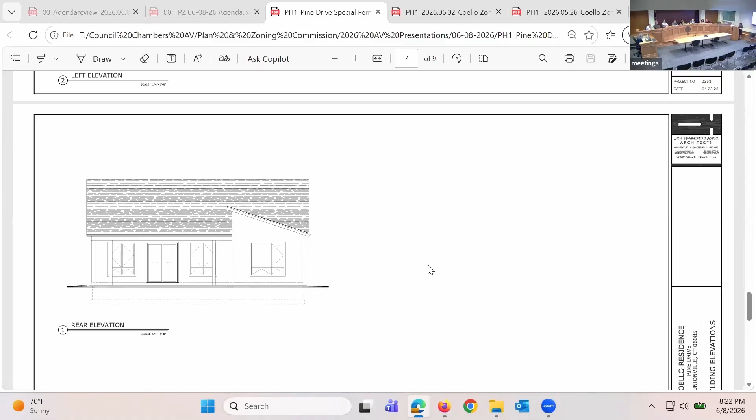There's a high level overflow. Typically, we put it at the house near the foundation so that when we get a higher storm, it's not backing up - it'll overflow and sheet flow through the backyard, and then continue down. So that's the entirety, but the patios, porches, driveways will sheet flow. The driveway will sheet flow out onto Pine Drive. Is that helpful?

I don't have any other questions. So this is here, so the elevations to the peak is at the 20 feet, 10 inches. And this is the left elevation, looking at 11 Pine, and the right elevation, looking at 17.

They may have that option. This actually looks with this opening here. They look like they've got this as the right. I would call this the left elevation. This elevation seems to be this side of the house, which I would typically call left as you're looking at it.

Well, isn't there a patio on that side though? It is, but this seems to be the jog out for the porch. This should be the front of the house, I would think. So the porch, and then - isn't that door into the garage? Does that door go into the garage? It could be. No, I think that's the patio.

That's okay, what I was thinking. I'm thinking, okay, oh gotcha. There you go. So then this is the patio.

Got it, because that's why the propane tanks have to go on the other side, right there. The propane tanks are going right here because there's no windows. At least, what is it, 10 feet from the door or 3 feet from the door? I forget, I don't know what it is.

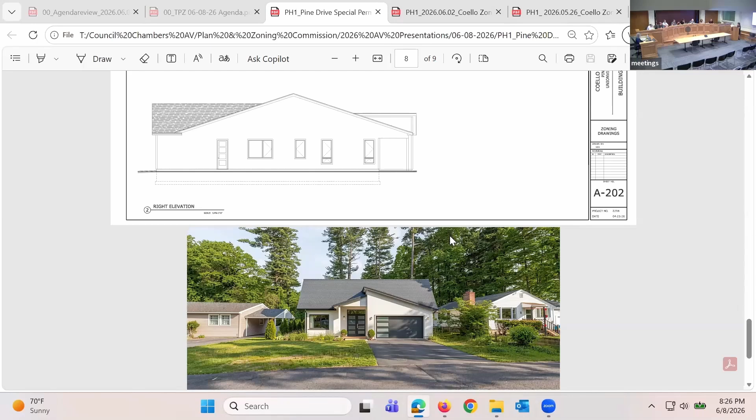So can you go slower through what you just said a minute ago, which is, so you'd have the 50 feet. We'd have 50 feet. And what would the setbacks be then? The setbacks would be 5 feet each, so we would make the house 39.5 feet. It would be further from the houses, but closer to the property lines. So the edges of the house would be further from the neighboring structures, but closer to the property lines.

Not really, honestly — you have more space between 17 with the lot line revision. The issue with the lot line is we have permission to move it, but if we do it before, it changes the lot for this and requires a special permit. So we could do it after, but then the house would be closer to 17 Pine, and you'd have this big strip of 5 feet that we can't build on because we didn't do the lot line revision before building.

Versus if we do it now, we're able to make the garage a couple feet bigger — a 2-car garage instead of 1.5-car. We could put garbage cans in the garage and shield the propane tanks. Instead of being 5 feet from the property line, it's really 8 feet in the back and only 6 feet in the front near the garage, but 8 feet in the back.

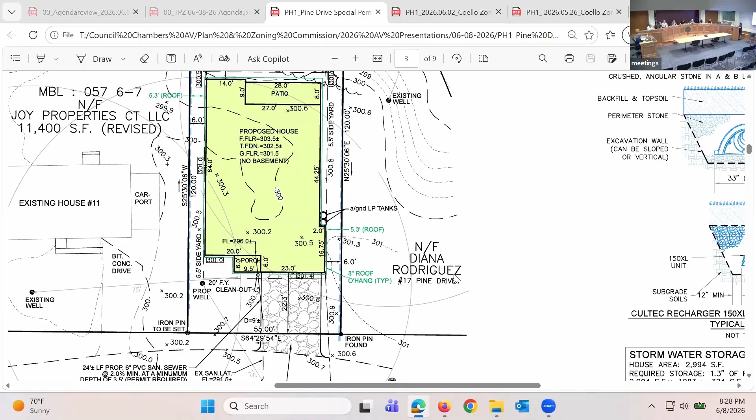With the original design of the house, honestly, it was the 40 foot, and I felt like we made a lot of improvements to the interior. We were able to add a full in-law suite, and that extra 1.5 feet really helped the interior. As for the garage, a 19-foot garage is very hard to park two cars in.

And you can't really put mechanicals in there, and you can't really put garbage cans in there. And then we would have the propane tanks at the rear of the yard. So yeah, the hoses are 120 feet from the propane companies, but it just wasn't as desirable. Then we'd have to make fixed windows in the back of the master bedroom because you can't open it, because you have propane tanks there. And then you have to put trees around to make it not look weird.

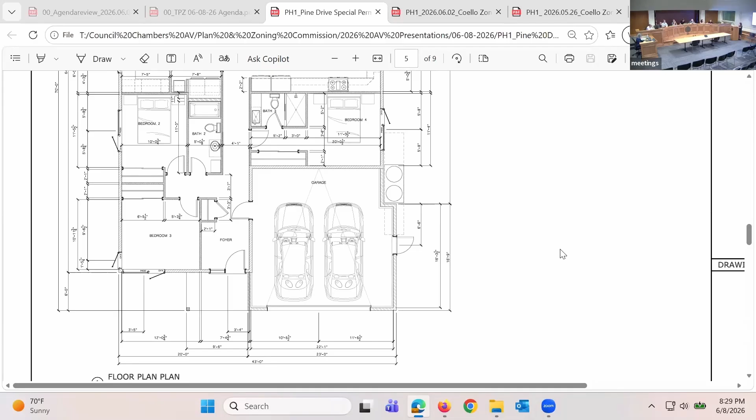So we just really liked this design. And it was a big investment to go with this design because we had to have an architect redraw everything from the original design that was 40 foot, whereas we could probably just submit that tomorrow and build it. But we just thought this design was a bigger improvement, and honestly, we thought it looks better on the lot. That's why we went through all the extra effort of having DHA, Don Hamburger Associates, redo it.

And then also in the time, we also made some improvements to the interior as well, because we were redoing the design. Thanks for elaborating and clarifying that, that's helpful.

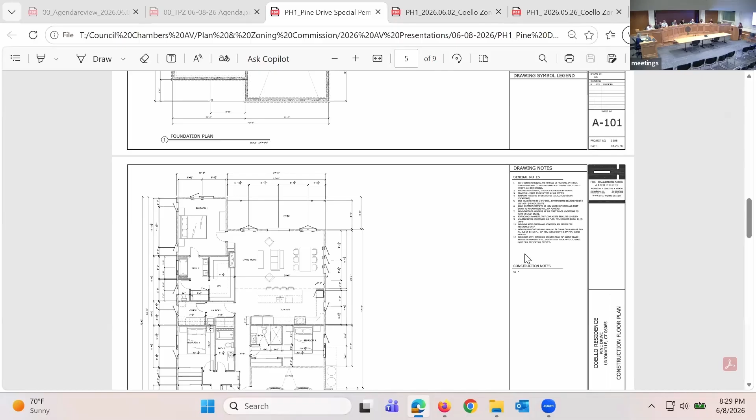I wonder, hearing some of the commissioners' concerns and maybe some of my own, like some of it is the intensity of the use, but I think some of it is the design and the height and the prominence of the roof, the contemporary design that makes it appear even more imposing than a similar house of similar dimensions. So in other words, could you make the house the same width and length, but change the front design, maybe the roof height, such that it seemed less imposing?

It's a unique situation, certainly. I get that, and you just talked about the expense you've already incurred, so I understand. But in an ideal world, I guess that to me might be ways to help mitigate, to give you what you want, your ideal square footage and hopefully design. I'm not an architect, I don't know the implications of everything I'm suggesting, but if there'd be some way to change the frontage of the house and perhaps the roof angle or height, that perhaps it would be a better solution for the neighborhood.

We've actually had really great comments from the neighbors we showed the pictures to of the design, people like it. People we've shown it to really liked it, which is one reason why we got a letter from Diana next door. So I do hear you, and that's definitely a matter of preference. Thank you, I definitely do hear you.

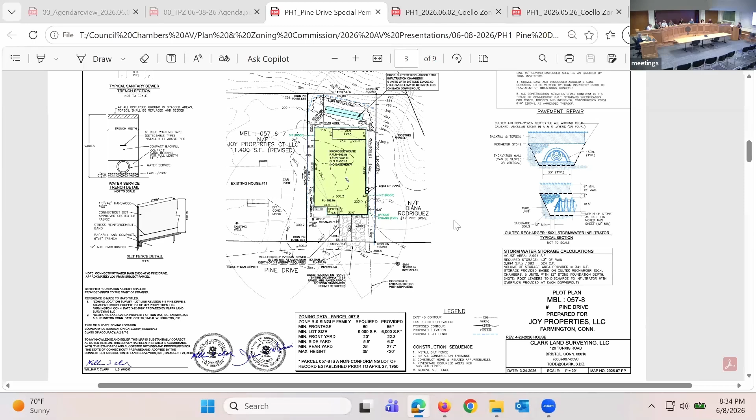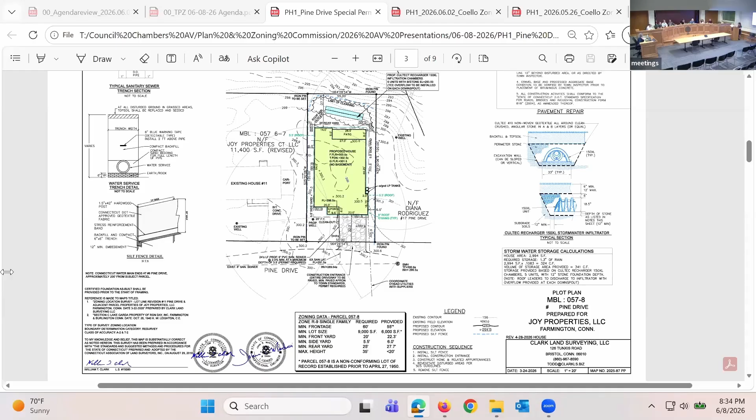No, Mr. Chair, there are no hands raised, so I will just— hang on, there is a hand raised.

Okay, yes, if you could give us your full name and address, please, and then address any comments or questions you have to the commission. Thank you, are you able to hear me? We sure are, yes, go ahead. Okay, thank you. This is Charles Yance, 14 Colony Road, Unionville, Connecticut, 06085. Do you need any other information? Nope, that's okay. Go ahead with whatever comment or question you have for the commission.

Yeah, so we appreciate all the information that was shared. I think echoing concerns that were raised, I think the two things about the neighborhood and comments regarding the character—everyone's aware it's correctly described as intensive usage of the space, but what we've seen over the last 10, 11 years we've been here is increasing shoehorning in of large houses on small properties. So it's not unusual for this to be the direction with newer builds. And I think most of those have accommodated it by building up, and that's been more jarring to the sight lines and look of the community than the building out.

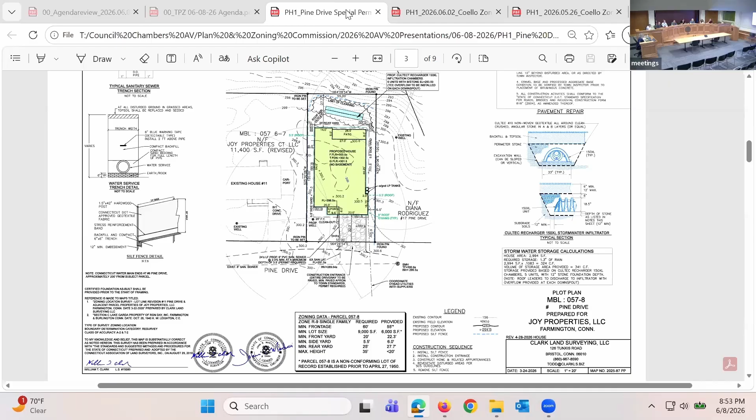Thank you very much. So Liz, we can follow up with you tomorrow.

So just to clarify, that did not pass? Correct. Okay, so the person online didn't vote? They don't vote, the 6 members. And Rob did? I don't vote because I'm an alternate right now. Correct. Oh right, so it's a six member board with 2 alternates this evening. Okay, thanks for your time guys. Appreciate it. Thank you.

All right, do we have a planner's report? Okay, it's brief. We have sign regulations.

Staff has finished going through, we finished that on Friday. There's one nuance we're working through. I'm going to get it sent to Bob D within the next few days for him to take a look. Garrett did a deep dive for us with respect to CGS, the Connecticut General Statutes, and case law, and content of sign. There's two things in particular I'm going to ask Bob to chime in on, and that's with respect to open signs and directional signs. Now that staff has finished going through, I'm going to kick it over to him, and then once I get his thoughts, I will circulate it to you folks for discussion. I'm sure you'll have as great fun with it as we have had.